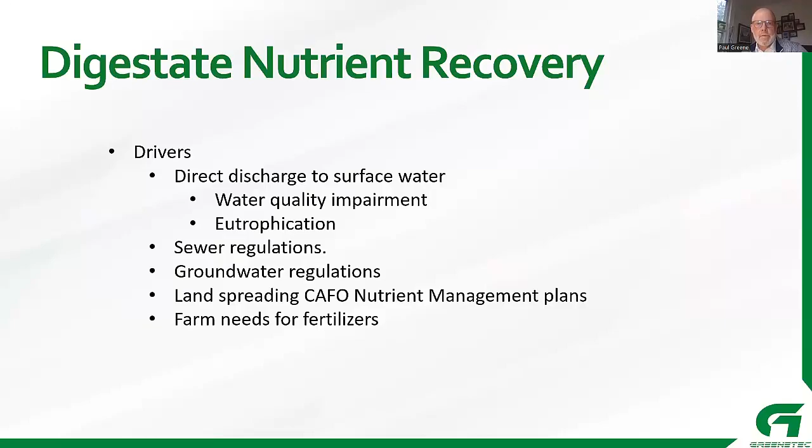So common mistakes on RNG projects - don't forget the nutrients, right? People talk about the feedstock and the carbon and the VS and the TS, and that makes the good stuff, that makes the gold, that makes our RNG. But don't forget the nutrients staying behind in the digestate, because if you do, the project will hurt.

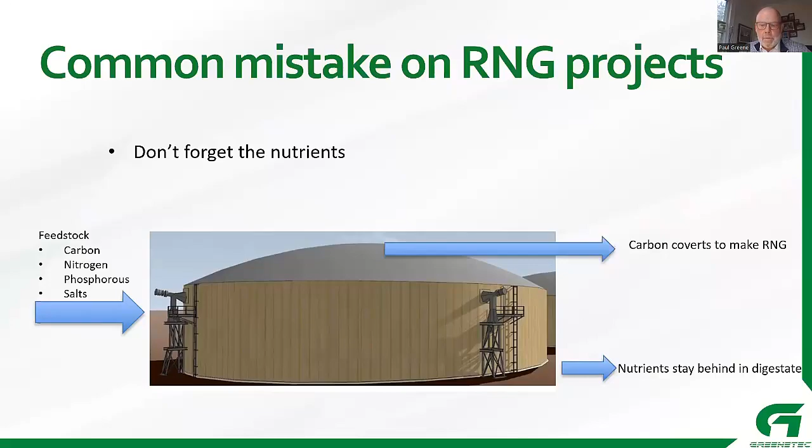So thinking about nutrient treatment versus recovery - treatment, a lot of technologies come out of the wastewater treatment space, so you're kind of treating it as a wastewater, destroying the nutrients, kind of hoping they disappear. Recovery is we're trying to capture nutrients in a way that creates a value-added fertilizer that the crop-growing community finds to be of value.

Some things to think about are price volatility of operating cost chemicals, acids and caustics, and price volatility of recovered fertilizers. As you make a capital investment upfront in a significant asset, there are some costs that are hard to control. Finding a long-term off-taker on recovered fertilizer for secured price - the fertilizer market has been very volatile of late. The war in Ukraine really triggered some real volatility in prices of things like ammonia, so trying to make good decisions in light of that.

Material handling and storage is a concern. Your digestate's going to come out 24/7, but sometimes fertilizers are only required a few times a year. So as you recover nutrients from digestate, what are you going to do with them? Are you responsible for them? Do you have partners that can help take up some of the slack?

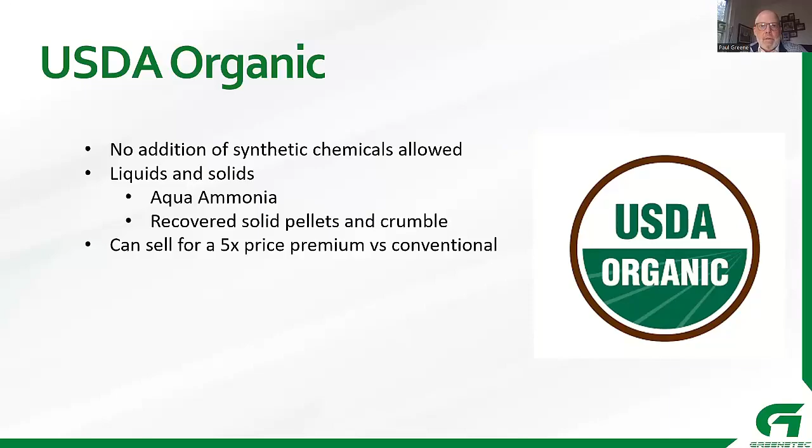Also think about applying the fertilizers - are you applying the fertilizer directly to the soil? Some plants you can apply directly onto the plant after it's come out of the ground, but certainly want to make sure that it's all compatible.

So fertilizers, things like aqua ammonia, you might find them in the 5 to 16% nitrogen range. Sometimes they're stabilized with something like organic citric acid. Ammonium sulfate is another common one, where you've got sulfuric acid reacting with ammonia, and ionically you're making that ammonium sulfate, as well as organic ammonium.

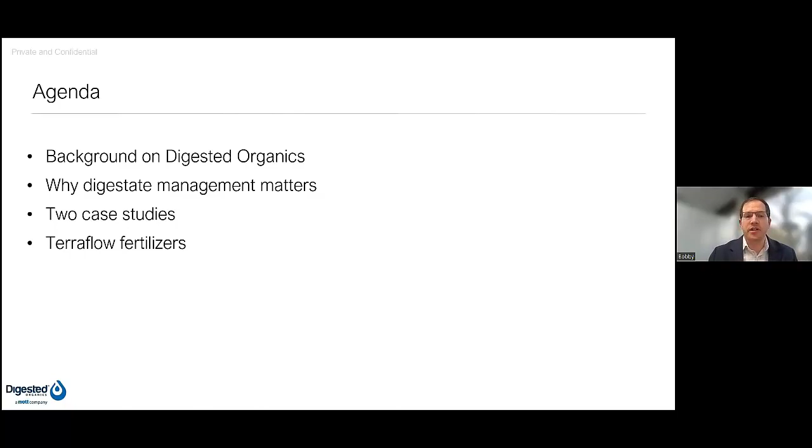Which we brand under our TerraFlow Fertilizers brand name. Our vision and our mission is to upcycle liquid organic wastes into clean water and value-added products, particularly when we talk about digestate, which is usually on the order of 97% water, 3% nutrients. There's a lot of water there to reclaim in certain areas, and that means more than others, but those products also can mean a lot in terms of revenue generation and added environmental benefits.

So we do this both for digestate as well as a slew of other waste streams throughout various industries. As a company, we are a full-service engineering and manufacturing firm based in Michigan. We engineer, design, and then make filtration systems to tackle lots of different waste streams. Today we'll be talking about digestate, and I want to highlight that we do that in a project management environment. Every project gets a unique project manager dedicated to it, looking at all the unique aspects of that project for our customer, which tends to be a developer or an EPC, as well as their customer, which is the farms, the community, et cetera. So really looking to provide holistic digestate treatment solutions.

Here's a couple of pictures of our shop. We're about a 20,000 square foot facility in Plymouth, Michigan, just outside of Detroit. As a company, we're about 50 individuals in our unit, and then we merged with the Mott Corporation, a larger company based in Connecticut, about 60 years of specialty experience with gas filtration. Pairing both of our companies together, we really offer a full suite of services, both in the liquid side also.

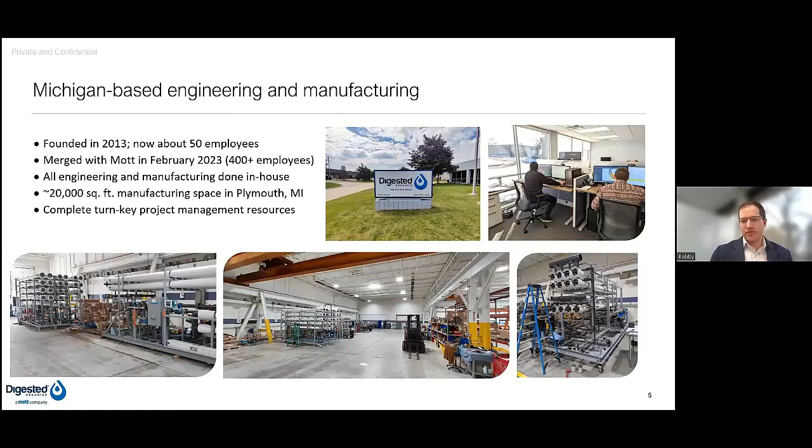So what we're going to talk about today is really how our platforms can convert digestate into value-added resources and increase profitability in your projects. It really is in some cases a closed loop where we're taking this manure that's been digested, going through a solution, typically filtration based, but also sometimes with evaporation and other technologies added on, getting that clean water and organic fertilizer back in a loop to that animal. Whether that's water for animal drinking water or fertilizer to grow crops that animal will eat. So really trying to holistically address what a lot of these biogas projects are facing when it comes to nutrient management.

A couple of the benefits, and really the reason why you would do digestate treatment and not just land apply the digestate, I break it into financial, environmental, and social benefits. I just want to highlight on a couple of these because Paul already mentioned this. Obviously, there's reduced hauling and spreading costs.

But something that fewer people know about is that if we actually treat the digestate and remove volatile solids from it, we can improve a project's CI score, because the model assumes a certain amount of leftover organics that are stored in our lagoons and still release methane. So we've actually quantified that and can help customers evaluate the impact of that.

Obviously, if you can sell fertilizer, that's a huge value add to a project that might not have had that before. I think we're also seeing a change in mindset where if you can tell the feedstock providers that you can reduce volume—so if a farmer gives you 100 gallons of manure and you only give them back 50 gallons of digestate—they're willing to pay for that in essence. And that can be a big part of the economics of how a project was run.

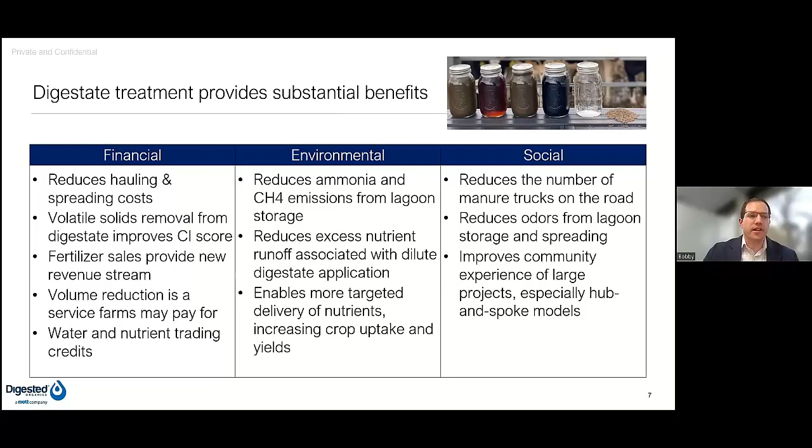There are kind of four main types of digesters that we're working with today: dairy, swine, poultry, and food waste. I think each of them have some unique characteristics I just want to highlight, so when you think about some of the solutions we offer and the projects you're running, you can think about what makes the most sense for you.

So dairy—some of it tends to be pretty dilute, so it's costly to haul and spread. But when we look at the two case studies I'm going to show you, one makes a liquid concentrate that has almost all the phosphorus in it, and the other makes a solid concentrate. Some sites are set up to handle solids, and some are not—some just have lagoons. And so that's sort of a major consideration when we think about spreading throughout the year.

In swine, we see a lot of large covered lagoons that get cold in the wintertime and don't produce gas. But if we want to process digestate year round, how do we do that in a way that preserves those volatile solids so that the gas revenues don't suffer? We have a solution for that. And then we also see that they're facing nitrification and denitrification costs from existing treatment programs that we can overhaul, and actually use the nitrogen to make a fertilizer instead of just paying a bunch of money to put it into the air.

Poultry, and to some extent food waste, are unique in that they tend to come in with a really dry feedstock. So some of this poultry manure litter can be 40 to 50 percent dry matter that requires dilution.

We can help with this by adding a liquid through the digestion process, then you need to pull that liquid back out, typically remove the ammonia and reuse the liquid because you can't afford to dump in fresh water and then haul away digestate. That, again, with food waste can come in pretty high solids as well. So it's something to think about in each of these feedstocks, and something we have solution sets for.

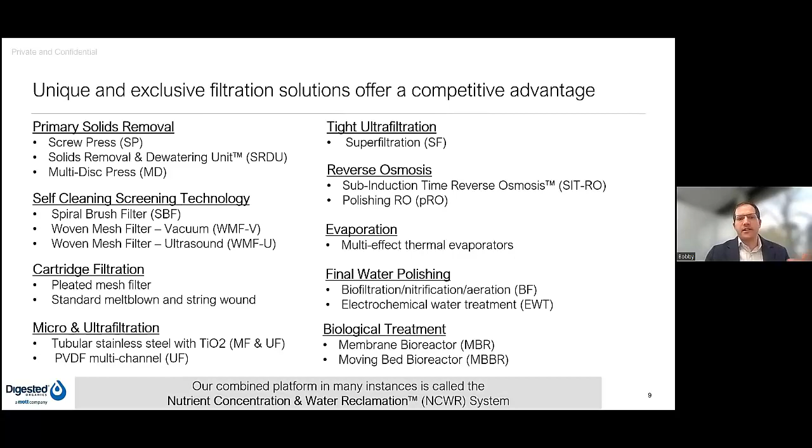This is the entire slew of equipment and unit operations we provide. We're not going to go through this in detail. Instead, we're going to focus on two main case studies that highlight several of these technologies and how we put them together to treat digestate.

The first technology platform I want to talk about is what I call our all-liquid platform. Basically, all of the concentrated nutrients are in a liquid form. We're not making a stackable solid anywhere.

This is our BC Organics project in Greenleaf, Wisconsin. Dynamic is the owner of this project, and it is designed for 720,000 gallons per day of pressate. They're digesting dairy manure and screw pressing it, and we get the liquid pressate from the screw press. We're designed for 50% recovery as clean water back to the farms or to be river discharged.

The technologies we're using are a stainless steel ultrafiltration system, which is a tubular membrane, superfiltration, which is a tight ultrafilter with very fouling-resistant chemistry, and then a unique process for reverse osmosis we call sub-induction time reverse osmosis, a sequencing batch style process to help boost recovery and lower energy costs. We then polish that water with biofiltration.

The key to this whole platform was to keep all the concentrates liquid, designed so everything could be pumpable and easy to move back and forth to the farm, really targeting volume reduction for these farms.

I have pictures, but I also thought, if this video will play, we could just see the equipment as it is at the farm. We'll narrate here as we go, but this is the facility.

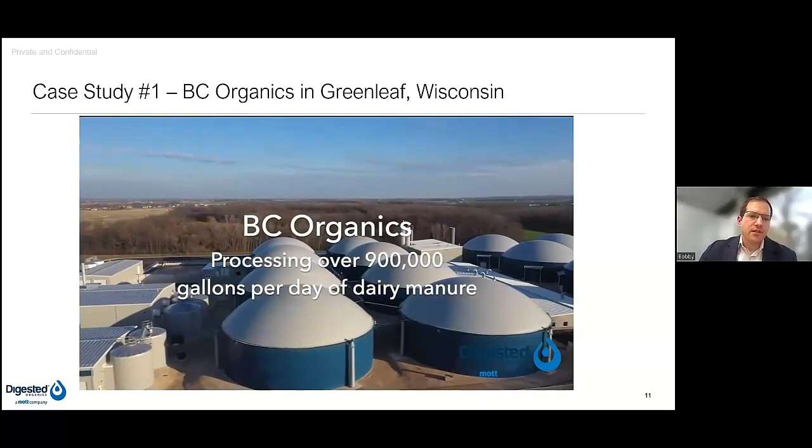It has 16 large digester tanks that are 1.3 million gallons each, processing close to 1 million gallons per day of raw manure coming in. This building here on the floor is where the water treatment equipment is. They're using Börger presses to create liquid pressate, and then around 135 tons of fiber per day.

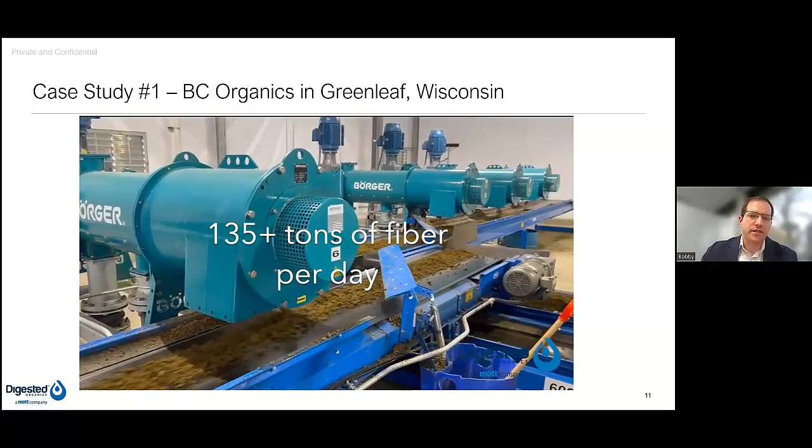This is just upstream of our process. This is pretty common, to create a bedding product. They're actually then running that bedding product through rotary dryers to create a sellable bedding product for nearby farms to purchase, and there's some excess product that is also produced.

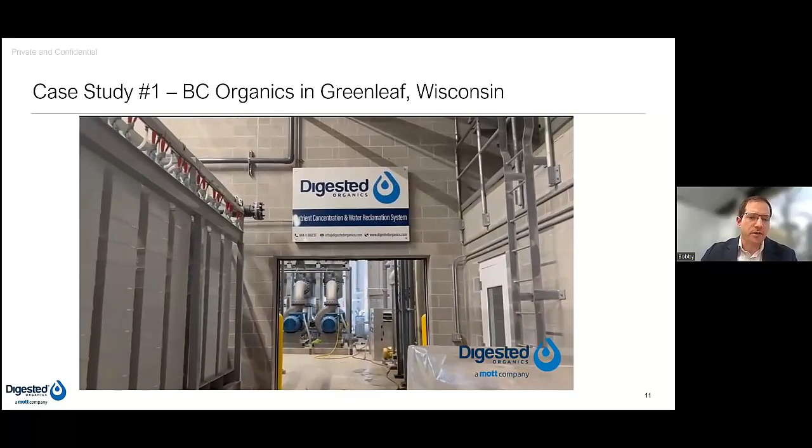This is our facility called the Nutrient Concentration and Water Reclamation System, again comprised of multiple filtration unit operations. This is looking at the ultrafilter, the main first step in the process, taking the pressate and removing suspended solids, which is principally all of the phosphorus.

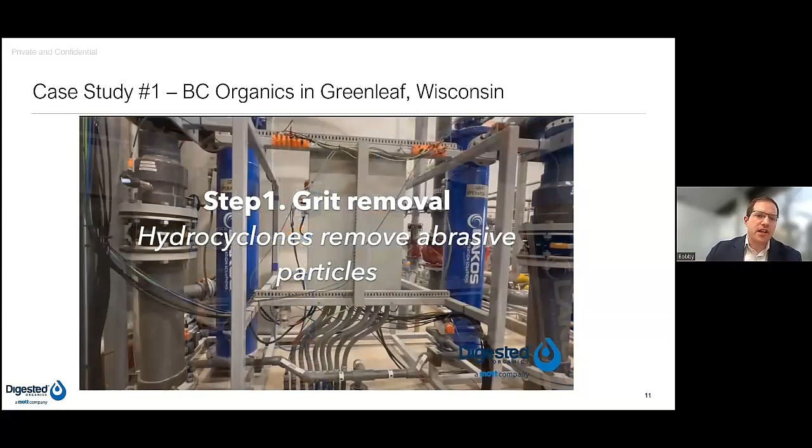The first step on the way to the ultrafilter is actually some grit removal, to help remove sand and abrasive particles before going to the filters. This is a non-powered, hydrocyclone-like approach. These are the stainless steel ultrafilters, and again, we're seeing 90+% phosphorus and organic nitrogen removal in these, producing a clear amber colored permeate.

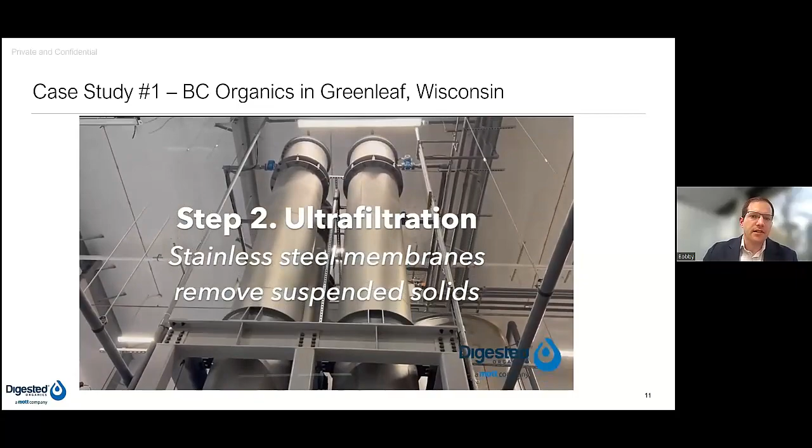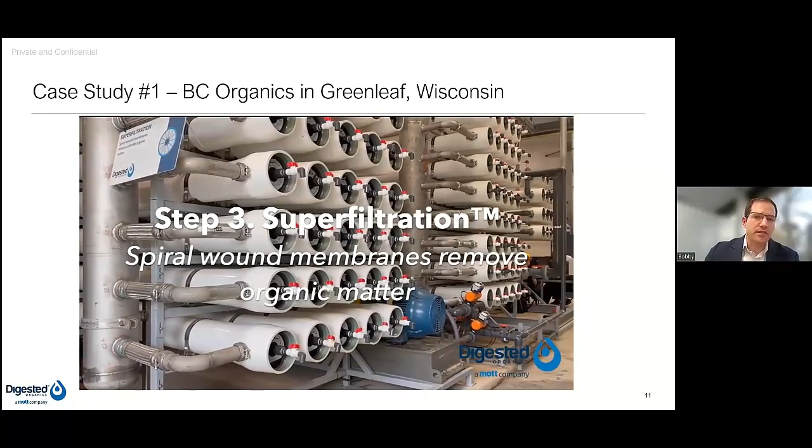This is what the superfiltration looks like. These are spiral wound membranes, and again they're doing a tighter cut. It's sort of like a second stage of ultrafiltration, but with a very tight ultrafilter membrane, to get lighter colored permeate that'll then go to the reverse osmosis system.

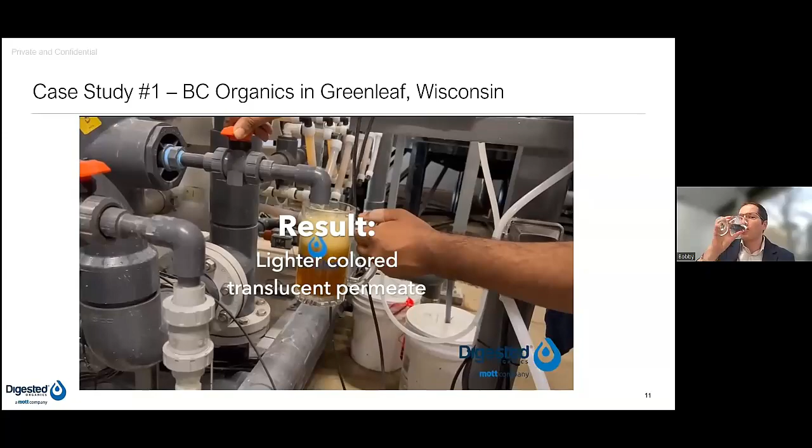This is the high pressure reverse osmosis system. There are actually two ROs in the project. The first is high pressure, concentrating all of the ammonia and potassium into a liquid concentrate, and then making clean water, which you can see here.

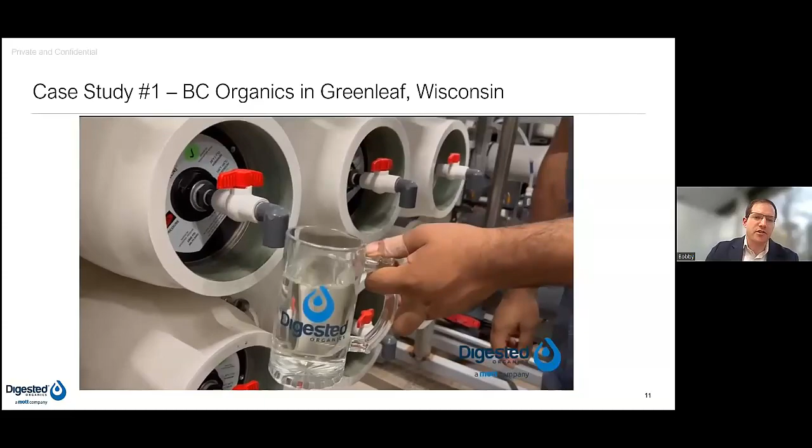That clean water is then put through a polishing RO at low pressure to do a final polish, another 90+% removal of various contaminants, including ammonia, to make our clean water product.

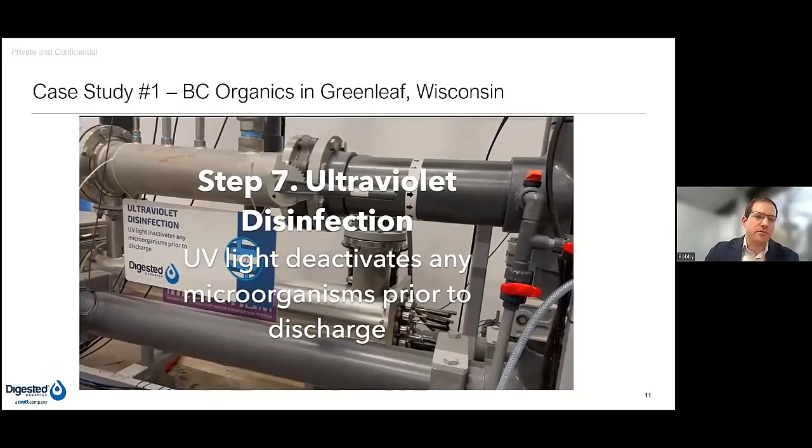And then as a final step on the way to the river, they go through biofiltration towers. These are packed with a small plastic media that bugs are growing on that can nitrify the ammonia, remove any trace amounts of organic matter left, and then send that water nicely aerated through our ultraviolet disinfection system and out to the river or back to the farms for reuse.

They have need of it for irrigation, like in warmer months.

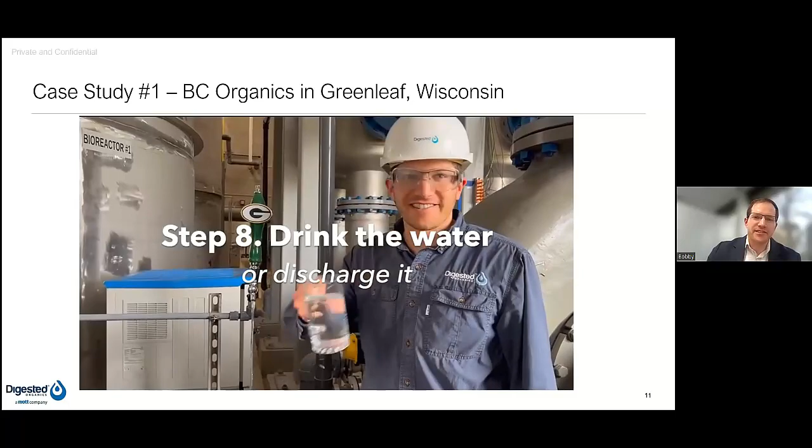And then here is a goofy video of me drinking the water on my last trip there. We have a Green Bay Packers tap for anyone who's interested. Actually tastes pretty good.

And then these are just a shot of the materials as it's going. So you can see it starts with the digested pressate on the left and gets clear as it goes.

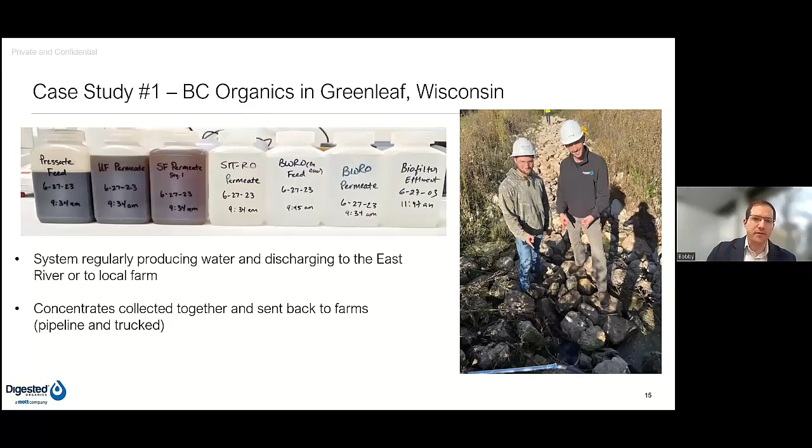Some of the learnings I want to highlight for people here that we've seen bringing online this large plant, really the largest that we're aware of that filters digestate at this scale, is that there's lots going on in our project, both with different unit operations as well as upstream.

So how are the screw presses running? How is the dryer running? If the dryer goes down for 2 hours, then we have to shut off the screw presses, and then we don't get pressate.

So I think we are learning about how to balance those different operations with potential upstream upsets, and where would we have rather had bigger tankage to allow for continuous operations while there's upsets. We have probably smaller tanks than we want between different buildings and operations, and I think that's something future projects should think about when you plan operations with lots of steps dependent on each other.

Something else I'll mention is temperature management. Our NPDES discharge permit requires certain temperatures for every month. Interestingly, in the winter time, as many of you know, the digestate is right around 100 degrees Fahrenheit, loses a little bit of temperature on its way to our building. We add a little bit of heat to it as we filter it.

We actually need to chill that clean water before it hits the river because it is too hot. Our water's coming out warmer than the discharge permit allows for. So obviously there's lots of ways to do that, whether it's geothermal or air-cooled chillers or things like that, but it was a requirement sort of outside of our scope, something we worked with Dynamic on that we didn't realize was going to be as much of a problem as it is.

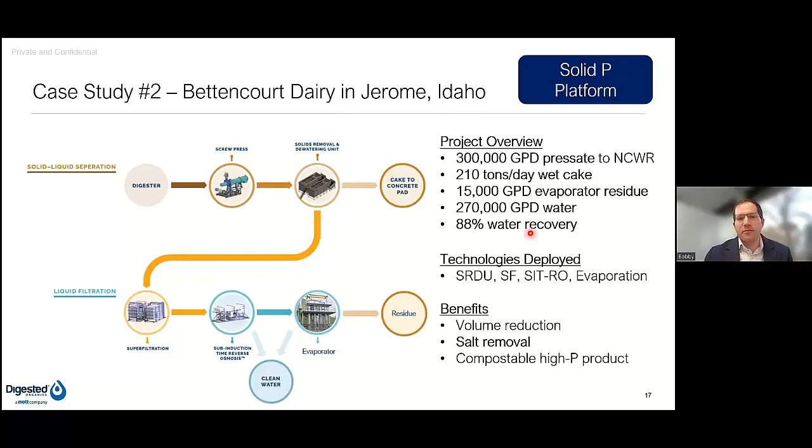This is interesting. And again, the benefits are really around volume reduction, salt removal, and then making a compostable high phosphorus product. So this is what the SRDU looks like.

It's a unique system to get compressed air and very unique high molecular weight polymers into the digested pressate, flocculate it, float it, and then press it to make the cake and a clarified digestate.

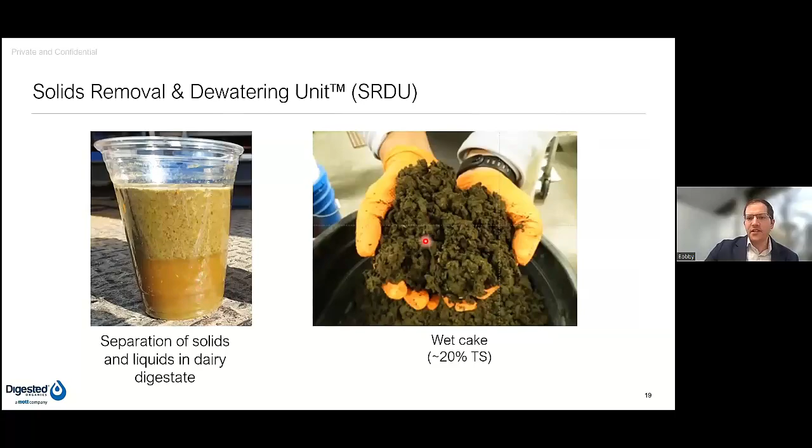Again, this is containing most of the phosphorus, and then this is the clarified liquid. This is an example of what that cake looks like—a nice stackable cake, usually around 20% solids.

In terms of volatile solids, we're seeing about 75% removal. This goes back to that CI score I was talking about—if your project today is just evaluated as digester plus screw press, or even digester plus centrifuge, we can use this technology to remove 75% of the volatile solids. That will result in like a 10 to 20 point CI score bump, which we've had verified by third parties. So that's one interesting thing this does.

The second is removing about 84% of the phosphorus present in that pressate. So a very high removal rate on phosphorus, also on organic nitrogen and suspended solids, and it sets you up well for downstream filtration. But if you're a project that just needs phosphorus removal and wants a little CI score bump, bolting an SRDU onto what you're currently doing can be really advantageous.

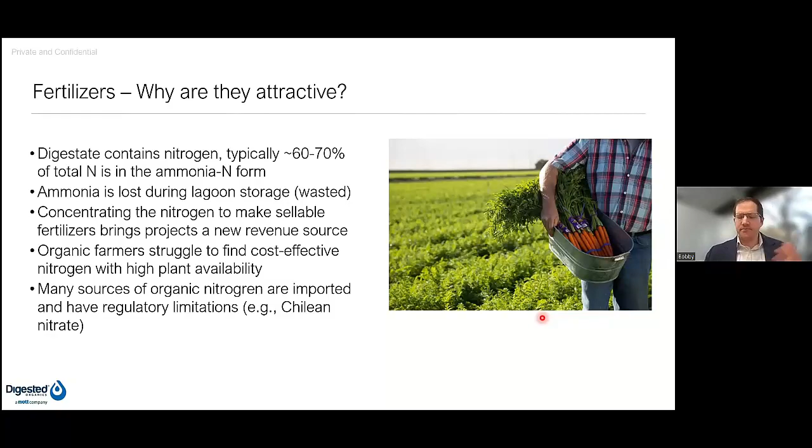We want to deliver plant available nitrogen out of the gate. And finally, some of the organic sources today are not only expensive, they have regulatory limitations—like Chilean nitrate, for example—and it complicates how growers can distribute that product. Canada has different regulations than we do. So it'd be great to have new sources.

So we have two kinds of products I want to talk about. The first are aqueous ammonia solutions. If you're not familiar with fertilizers, they're usually labeled with their N, P, and K. So we have an 800 and a 1600 product. They look and handle identically—like water, no salts in them, but they are volatile, like Paul said.

So we're at high pH, and they need to be treated the way a farmer would handle conventional aqueous ammonia. That means it's tilled into the ground, diluted and distributed through drip tape—not center pivot irrigated into the air, for example. So it's nothing new for agriculture; farmers have been dealing with ammonia, even anhydrous.

It's just a new consideration for organics. Obviously both of these are OMRI listed—they are certified today for use and ready to go. So we've crossed that hurdle, and we've created two concentrations so buyers have options. Obviously, it's less expensive per pound of nitrogen to move the 1600 than the 800, just because of the concentration.

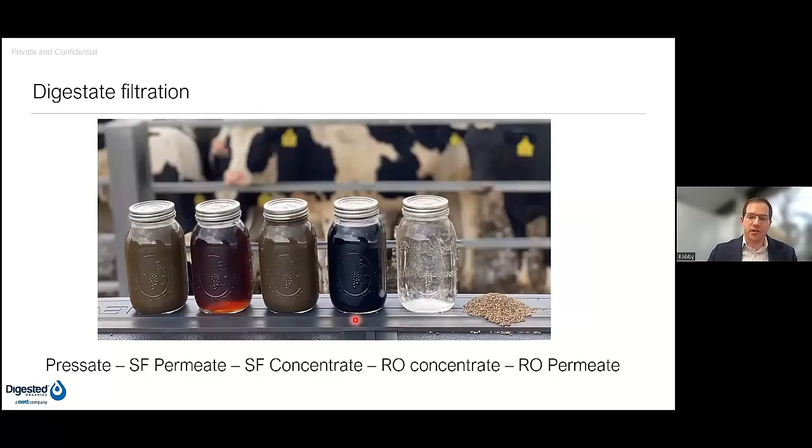One final thing I want to end on. A lot of developers are interested in these hub and spoke models, but they have dilute manure or manure that's really far away from the digesters. So something I think we can also offer is a filtration solution that actually concentrates the volatile solids in the feedstock prior to digestion. This also concentrates the phosphorus and organic nitrogen. We use our ultrafiltration or our SRDU for this, but just wanted to say that's another technology we're offering the industry. We have some cool videos on YouTube that Paul's been great about putting up for educational purposes, so definitely check that out.

If you have a project, we'd love to talk to you about how we pilot. We have a significant pilot program that involves either samples coming to us in Michigan or equipment coming to you wherever your project is. It's a big part of how we start working with a client, and also how we show them, with their exact digestate or manure, where nutrients partition and how best we can serve them with different technologies. So I'll stop there and see if there are any questions.

Thank you, nice job. So the concept about CI score improvement is getting some traction. I'll read this: Why would nutrient separation improve CI score by removal from digestate? If they're volatile, was the digestion process inefficient? How much would separation improve the CI score approximately?

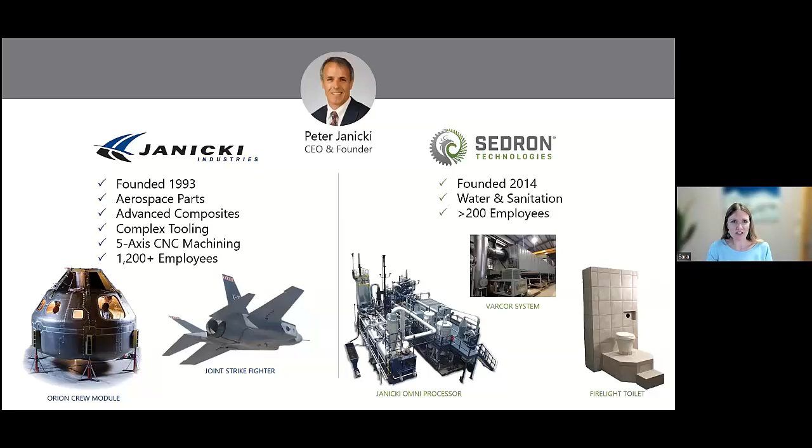Before I talk about the Varcor, just a bit of background on Sedron to give a bit of grounding as to who we are. So we were founded about 10 years ago, but we have a longer history than that. Much of our leadership came from our CEO and founder's other company, Janicki Industries, which is about 30 years old. Janicki Industries is a technology leader in the aerospace and composite world, and we like to say that if you see anything in the air, whether it's private, commercial, military, whatever, Janicki Industries played a role in the technology development of that piece of equipment in one way or another. And that same technology development DNA is at Sedron.

So Sedron's an engineering-centric company, and we like to innovate every part of the business and be quite vertically integrated. So we invent technology, we do all of the detailed mechanical, electrical, chemical design, we design our manufacturing facilities to make that equipment ourselves and make it inexpensive. We build all of our electrical panels, we write all of our controls, and then we also go as far as developing the projects, installing our equipment, and then operating our equipment long term. So we don't actually sell our technology, we own the business holistically and provide it as a service. Apologies, I've got a cold and my voice is struggling, but I think I'll be able to get through this.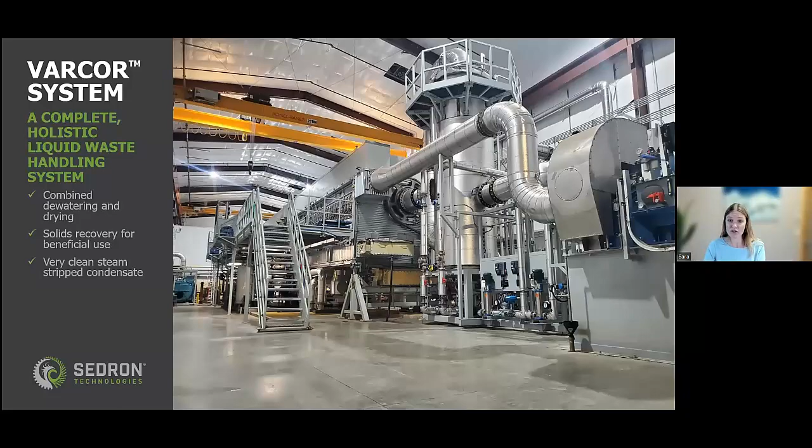So the Varcor, though, that's what we're here to talk about, relative to digestate. The Varcor system is a holistic liquid waste handling system. It combines dewatering, drying, and distillation to take in a wide variety of waste streams and separate them into beneficial reuse components, depending on what's coming into the Varcor. It also creates clean water that can be used for many purposes.

At a super high level, what the Varcor does: it takes in the liquid waste and sends it into a dryer as the first step. In the dryer, the waste is heated up to boiling, so all of the liquid leaves and you're left with a dry solid that's pathogen-free, seed-free, weed-free coming out. Going back to Bobby's comments on NPK, it's typically about a 3-3-3 product if what's coming in is digested manure. So that's a fertilizer product, pathogen-free.

The vapor that leaves is sent through a compressor, and it's now at a higher pressure and temperature, and that is used as the energy source for drying additional incoming waste as that steam is condensed. Then that saturated liquid is sent through a stripping process where we separate the water from the nitrogen ammonia, so you're left with three outputs: the dry solids, a nitrogen fertilizer—this is a 10-0-0 stabilized, pH-neutral fertilizer—and clean water.

The backbone of the technology, because we use a thermal mechanical process—a lot of people's gut reaction is, wow, that's a lot of energy if you're going to be evaporating a million pounds of manure a day. But we use mechanical vapor recompression, which is much more energy efficient. So just a very basic overview of how it works, because we get a lot of questions about this as people try to wrap their minds around what we're doing.

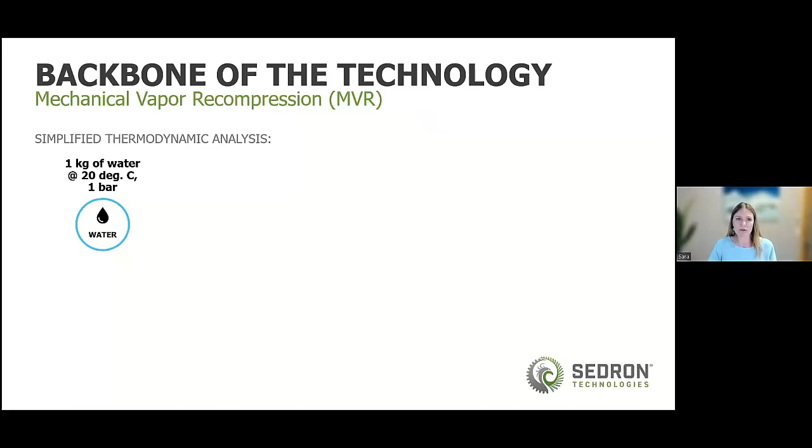If you take a kilogram of water at ambient conditions and turn it into steam, your gut reaction is right—that takes a lot of energy. It's about 2,400 kilojoules for every kilogram of steam that you evaporate. But if you then invest a small amount, about 50 kilojoules of energy, to buy electricity to run a compressor, you now have that same steam at a slightly higher pressure, about 1.4 bar.

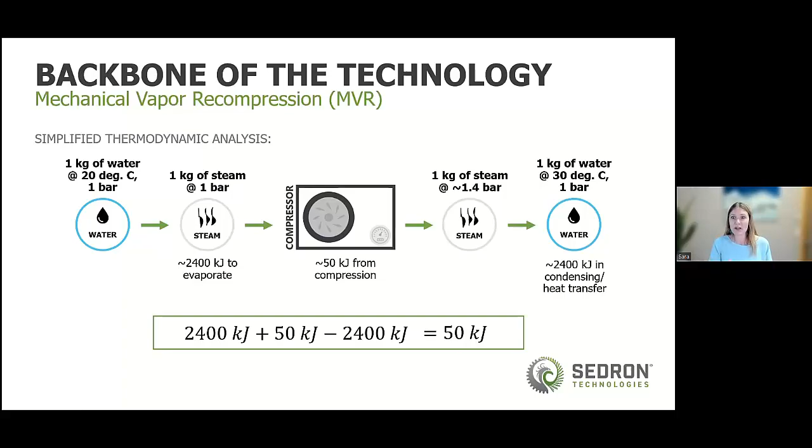Now, if you recondense that, you can get that 2,400 kilojoules back. If you draw a box around the whole thing and look at a first law balance, you took water from 20 degrees to 30 degrees with ultimately only investing 50 kilojoules of energy. But in the meantime, you got to go through multiple phase changes and do all these clever things to separate the different nutrients and components into beneficial buckets.

If you look at that, a Varcor compared to a traditional natural gas boiler with just direct drying, we're about 30 times more efficient. We are doing 15 megawatts of thermal energy transfer in the Varcor, but we're only investing 500 kW.

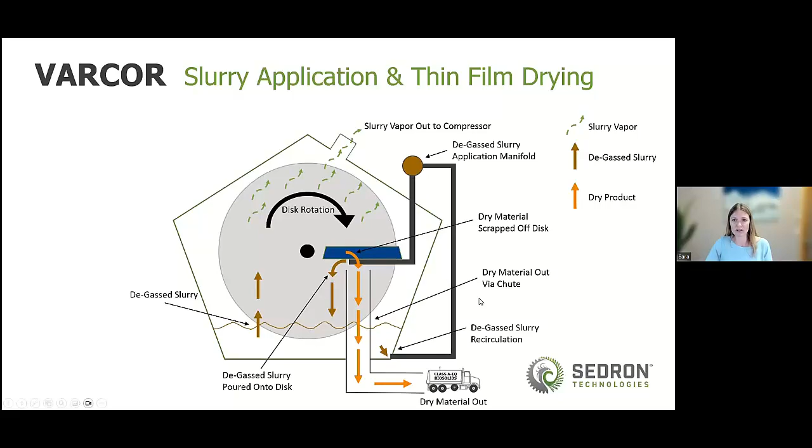All of your solids get scraped off and sent out to be managed as a dry product. All of the steam and vapor, ammonia, that would evaporate off gets sent out to the compressor. So that's the details of what's happening within the dryer. The excess material that doesn't stick to the disc face gets captured at the bottom of the evaporator and is sent back in this recirculating direct application system.

The vapor gets sent to the compressor where it's increased at approximately 0.4 bar and then is sent to the inside of the spindle. As it starts to condense, you get this stripping action such that most of the ammonia that's in the product is going to leave in a concentrated form out of the spindle in its own pipe. And the water is going to be stripped of that ammonia and sent out the other end.

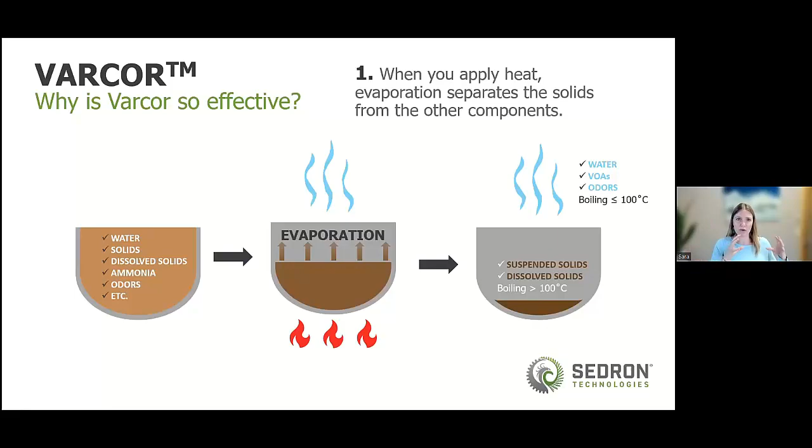It's incredibly effective and robust to do that every single time, no matter what the waste stream. Then if you capture that vapor, which now has water, ammonia, odor, other VOAs—anything that boiled at or below 100 degrees Celsius—and start to cool those products down, they all want to recondense at different temperatures. This allows us to capture them into separate buckets: we capture the odors and send them to odor control as a point source control, the ammonia recondenses at a different temperature so we capture that, and we capture the clean water. It happens every time the same way, regardless of what was in it to begin with.

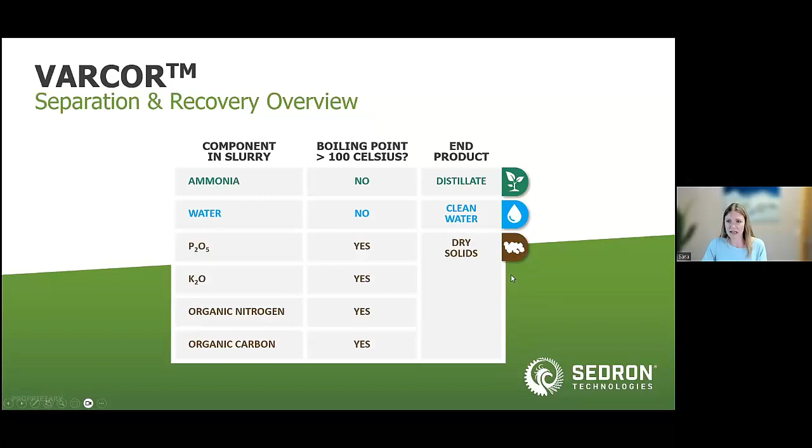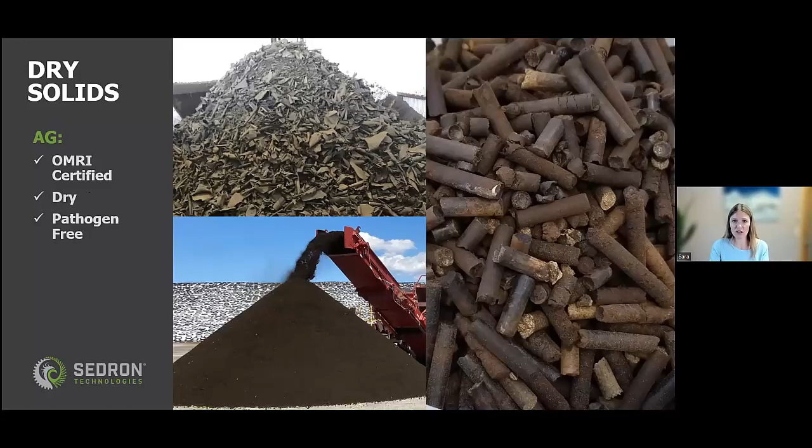And then we create this nitrogen fertilizer, which we have certified in two different forms—a 300 and a 1000. Bobby already talked about the benefits this has to farmers, so I won't elaborate too much more, but being able to have a pure nitrogen fertilizer source that is plant available in year one is really huge. This is a huge impact to the economic story.

Only got a few minutes left, so I'll go quick. Our core business model, like I said before, is that we don't sell our technology, we sell the service. We build out a project, and the project gets tipping fees. If tipping fees matter, sometimes we charge a manure management fee, sometimes we don't. In projects using human waste or other things, we might charge a tipping fee. But really, on a digester project, the real economic story comes from selling that nitrogen fertilizer and selling the solids.

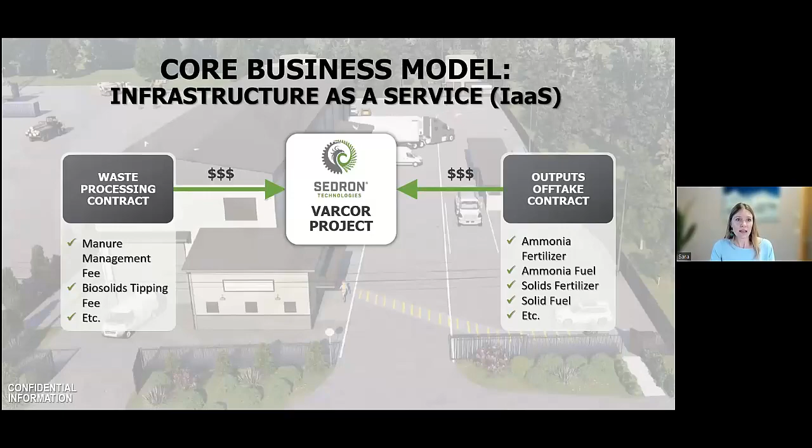Here's what it would look like at a couple of different farm scenarios. We can take raw manure in, do grit and fiber removal, and send it into the VARCOR to make your water, nitrogen, and solids. Or, with a digester like we're talking about today, you send it into the digester, it does its deal making biogas, then we do fiber removal and send it to the VARCOR after that. One reason we really like a digester project over raw manure is that the digester also converts a lot of your organic nitrogen to ammoniacal nitrogen.

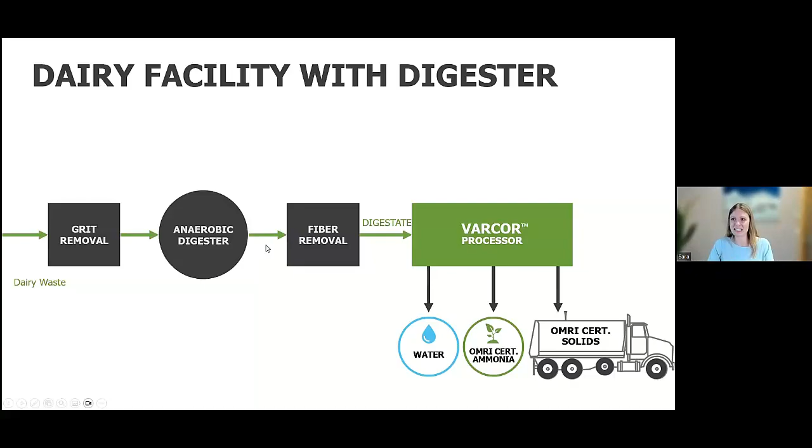So we actually make a higher volume of this organically certified nitrogen fertilizer, which really changes the economics of the story. So that's our favorite pairing, is a dairy with an anaerobic digester.

I'll go through this quickly, some of our sites that are up and running. Our first project was a 4,000 cow dairy in Indiana. This is with raw manure. It's been operating for about 4 years now, and we process about 40 million gallons a year of raw manure.

This was a pilot that we still have. We built it several years ago and we've run it at various sites around the world. We can ship this, it fits into 2 shipping containers. We can send it to a host site and run small scale testing to show how that product will behave in a VARCOR. Our first project was that we sent it to a rum distillery in the US Virgin Islands, ran it for about a month there. Currently it's at our facility here in Washington, running on direct biosolids. We can run it on all sorts of different products, and we can send it to the host site or test it at our site by sending the waste streams to us.

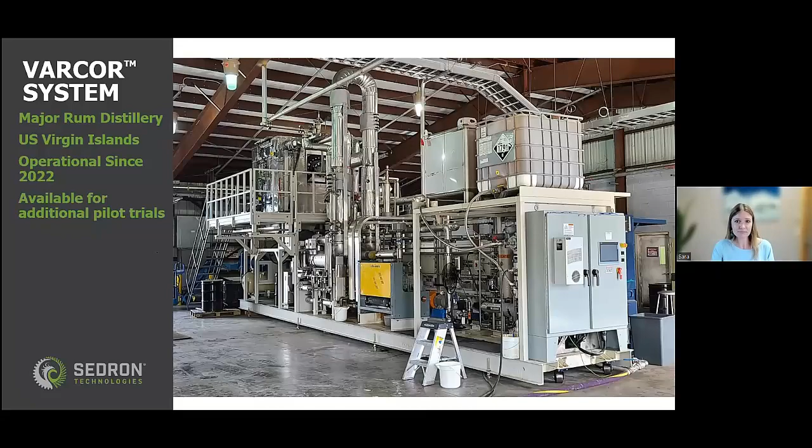Another project that we have up and running is in Washington State. It's been running for about a year. We get trucked septage and biosolids from the local community to our facility, and we process it through the VARCOR. Our dry product gets sent to farm fields in eastern Washington, and the clean water goes back to the city.

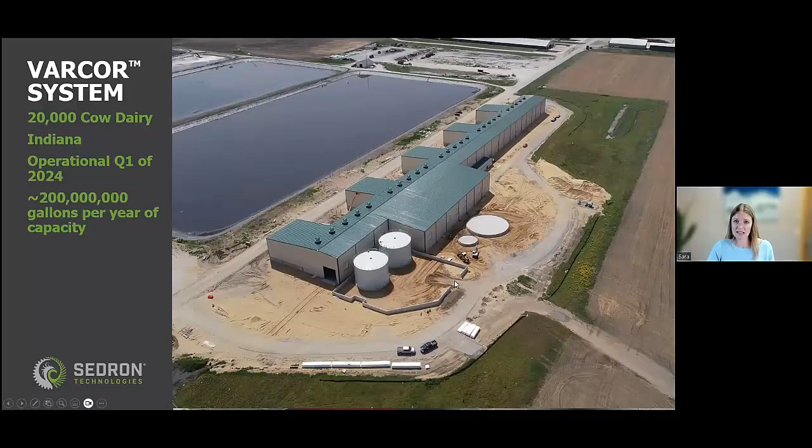Our next project to come online, starting commissioning next month, is for a 20,000 cow dairy with a digester in Indiana. This is taking digestate at about 200 million gallons a year. We have 5 VARCORs in this building end to end, and we're generating stabilized nitrogen fertilizer with a long-term offtake contract for that. The dry solids are going to local farmers in about a 200-mile radius.

And our next project coming online later this year has 3 VARCORs at a 12,000 cow dairy in Wisconsin. Sorry for rushing there at the end, but I am just at time. So that's the short story on Sedron and our VARCOR technology related to digestate.

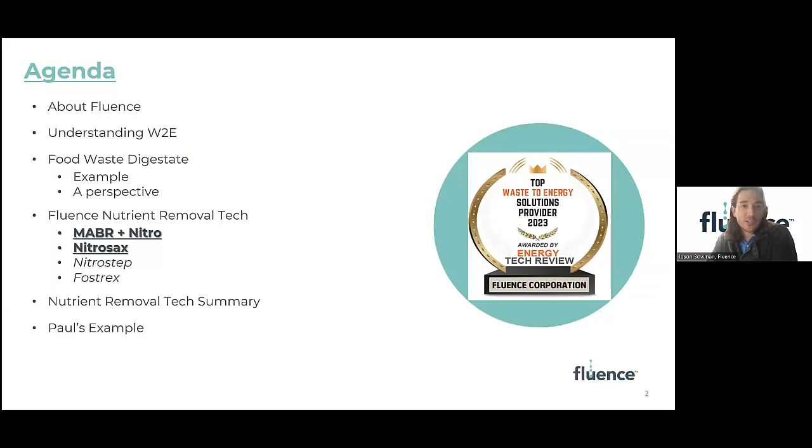But yeah, just to give everyone a general intro to Fluence: we're probably one of the biggest companies you haven't heard of in the US in terms of water and wastewater operations. Fluence focuses on everything that is water and wastewater, both on the municipal side and on the industrial side. My specific focus is on anaerobic digestion facilities, and the way Fluence operates, as I mentioned, we are a global company. So headquarters is in Minnesota, but we have engineering, design, manufacturing, marketing, and other management offices all over the globe. So we're pretty much in every time zone.

So what we are here today to talk about is the digester and digestate side of the business. Fluence being an anaerobic supplier, we do the design and supply of anaerobic systems. With our wastewater division, we know a bit about the digestate side. What Bobby and Sarah had talked about was more on the recovery side. When we're talking about digestate treatment, most of our technologies are focused on nitrogen reduction, i.e., let's destroy it or convert it to another form that comes out of the wastewater.

What I want to touch base on today is, depending on the type of project that you have, food waste - everybody puts it in its own little box, but if you go to 10 sites, you're probably going to have 10 different, slightly variable digestates. A lot of that depends on the type of digester and how the digesters are operated, but a lot of it depends on the pretreatment as well. So there's a lot of things that impact the digestate side of things, what's coming out of the digester, and we're going to focus a bit on that today.

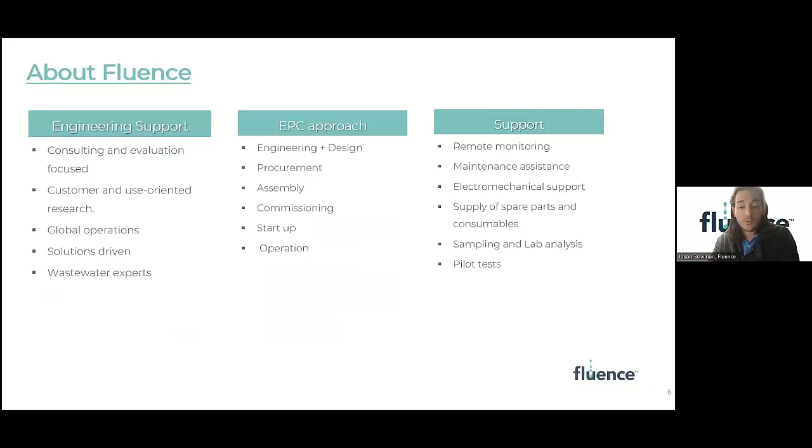Understanding anaerobic digestion and digestate in general, when you get into these big food waste projects, the type of feedstock that comes in impacts your, number one, digester design, number two, digester performance, and number three, what's coming out. When you start getting into feedstocks that are more lipid or fat based, there's a lot of energy generation there. When you get into projects that have more of simple carbohydrates, things like that, maybe proteins, the energy generation is a little less.

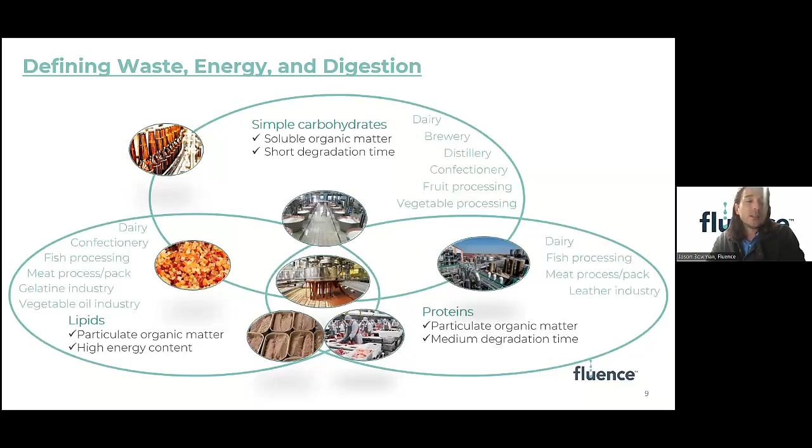So in these food waste projects, that's why a lot of times you see methane and RNG production going up and down, but also the characteristics of the digestate change, due to a lot of different mechanisms and a lot of different feedstocks out there. A lot of these facilities have multiple varieties of feedstock - it's a combination, not often just dairy, or just a brewery, or just a slaughterhouse. When you get into these larger cogen facilities, developer-driven facilities, you're trying to get as much feedstock from as many different sources as you can a lot of times. So understanding what you're getting and how that impacts your digester design and performance is really critical.

So, two points here quickly before we get into the nitrogen removal side of things. There's a lot of different types of digesters on the market. Fluence offers 3 different types of digesters, and we apply these digesters in different situations. When you get into food waste digesters and you have a combination of feedstocks, more often than not, you're going the conventional route with something like a CSTR. But there are other unit processes, and the reason I bring this up is they're all operated a little differently. When I say that, they're geared toward a certain COD concentration, or a certain volatile concentration, or a certain total solids concentration. So the way these facilities come together a lot of times can actually impact what the digestate looks like coming out on the backside. So let's talk about that for a minute.

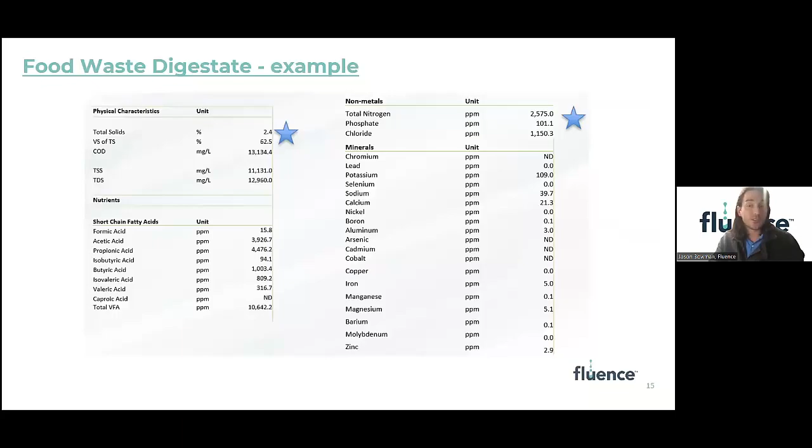Paul had given us an example of a typical food waste digestate - you have your total solids at 2.4%, TSS a little over 1%, and you see your COD there at 13,000. So we're going to use this as an example and roll forward with this, how Fluence would approach this type of digestate. I'm going to give you several examples using the digestate technologies that we have developed. To put this in perspective, I know there's a lot of engineers on the presentation today, and a lot of developers, so a lot of different backgrounds here.

One of the common things we run into when talking with developers or end users is, oh my gosh, why are these systems so large? As Paul mentioned, these are highly concentrated. To put Paul's example into perspective, a 60,000 gallon a day digestate flow rate with those characteristics is basically the equivalent of a 1 MGD municipal facility if you're just looking at the organics, or a 3 million gallon a day municipal facility if you're looking at the ammonia load. If you picture a 3 MGD municipal facility, it's large. So you're trying to treat the same loading, even with a smaller flow rate, in as compact a space as you can.

Putting these things in perspective is often key when it comes to these designs.

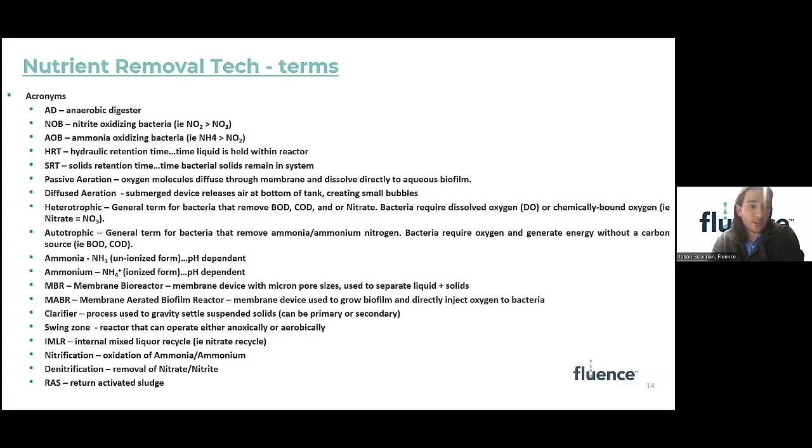There's a lot of acronyms when you get into nutrient removal technology. I'm not going to go over all these in specific detail, but they'll be here for you to reference in the future, and I'm sure Paul will be distributing or posting the presentations as well.

Let's get down to the nutrient removal technology that Fluence has. On a global basis, we're really known for two types of nutrient removal technologies, and they are shortcut nitrogen removal.

What I mean by shortcut nitrogen is, typically when the digestate comes out, it has a bit of organic TKN that, as Sarah mentioned, has been converted to a more readily degradable form - you have your ammonium, if you will. So what these types of designs focus on is taking that ammonium and converting it directly to nitrogen gas.

The conventional method of doing that has been a biological method, right? You either have a series of aerated biological reactors or anoxic reactors that are mixed, and what you're doing is oxidizing the ammonia to nitrite, then to nitrate, and then denitrifying the nitrate to nitrogen gas. So there's a lot of steps in between there.

The technologies I'm going to talk about today basically take that ammonia and skip the nitrate conversion step, going right to nitrogen gas. This is important because it saves a lot of energy - in conventional treatment, something like 40 to 60% of the energy that goes into these processes is that initial oxidation step when you go from ammonia to nitrite to nitrate. By eliminating that one step, you're significantly cutting down the energy in these biologically driven nitrogen removal systems.

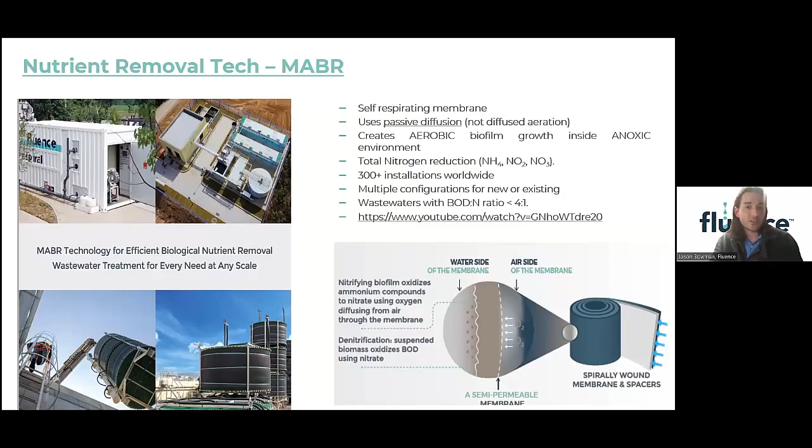Essentially what we're trying to do here is create a mechanism, an aerobic process inside of an anoxic process, so that we're getting simultaneous ammonia reduction and nitrate reduction. It's a much more energy efficient mechanism for removing nitrogen.

If we take MABR to the next level, we have a process called Nitro. Essentially, Nitro is the MABR process operated under a specific pH, a specific DO, and a specific ammonia concentration. If we can control these parameters, you can control the growth rate of specific organisms in these biological reactors. So essentially what you're trying to do is create a mechanism where you favor ammonia oxidizing organisms, but create a condition where the nitrite oxidizing organisms don't like the environment, so they don't grow.

This is how we shortcut the nitrogen removal process. We can take the ammonia to nitrite and then the nitrite to nitrogen gas, skipping that nitrate conversion step. So big energy savings here.

Now, most of the time when we're talking about MABR and Nitro operation, it is a high rate ammonia reduction process, but typically the rate limiting factor here is going to be about 100 ammonia on the discharge. So this is important to understand because the systems do a very good job of getting the initial ammonia reduction, but that last bit of ammonia reduction, there are more cost-effective ways this can be done.

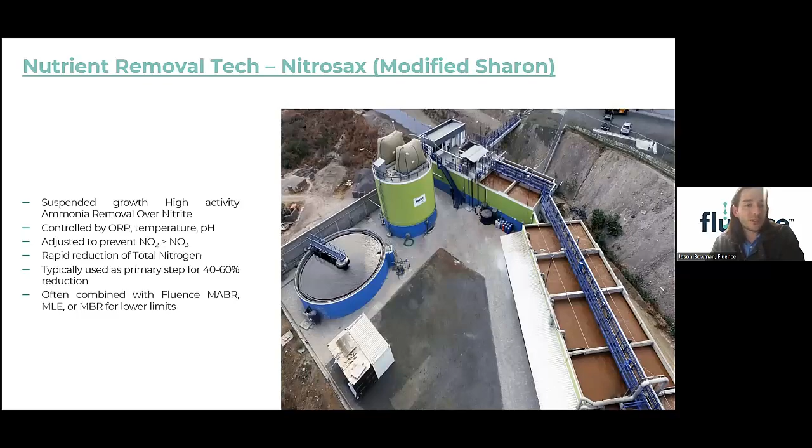Obviously, digestate tends to come in at a high temperature, so in most situations we don't have to adjust the temperature, but we have had some oddballs where, for whatever reason, the digester didn't have heat exchangers or wasn't operated at a high temperature. So there is a consideration in some cases where we do have to have a heat exchanger or something to boost the temperature up. Typically, we want to be 30, 35 degrees Celsius as a normal operating point.

So just to give you a 30,000 foot overview of the difference between the MABR Nitro and Nitrosax process, the main advantage for MABR and Nitro is going to be process stability. It is an attached growth process, so once the bugs are there, once they're populated, it's very difficult to lose that population.

The disadvantage to those technologies is the COD to ammonia ratio, or the BOD to ammonia ratio. If the organics are still too high, you run the risk of having too much heterotrophic bacterial population versus an autotrophic bacterial population. Basically, that's a fancy way of saying you lose the bugs that want to remove the ammonia, and you have more bugs that want to focus on the BOD. The BOD bugs grow much quicker than the ammonia bugs do. So we have to keep in mind that specific ratio, and I'll talk about how we address that in the upcoming slides.

With the Nitrosax process, it's a very simple process, very high rate. Again, it's typically aimed at getting the initial 40 to 60% reduction of the ammonia. So very cost effective, very simple. Main advantage, there's no additional chemicals that typically have to be added to the Nitrosax process, because when dealing with these digestates, typically the chemical ratios we need are already present.

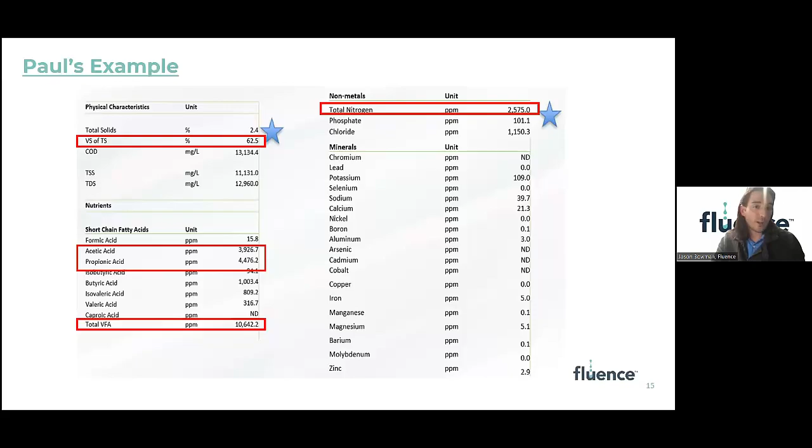Secondly, the COD needs to be knocked down to roughly a 3 to 1 or 4 to 1 ratio. Given the COD and TSS for Paul's example, what we would have recommended is an additional solid separation step, whether it be a centrifuge or a DAF unit or something similar, to get the total solids and TSS down to the 2 to 4 gram per liter range.

The second observation is we would likely want to put in what we call a swing zone, which is a combination anoxic-oxic reactor. Again, the point is to focus on that COD, to be able to knock down any soluble COD left to a point where we can maintain that 3-to-1 or 4-to-1 ratio I mentioned.

So at the end of the day, with Paul's example, what we would actually recommend is more of a conventional step, because of that TSS and COD ratio. So what we're looking at is a two-step Nitrostep process, anoxic followed by an aerobic reactor. We'd have a nitrate recycle and a secondary clarifier. With this type of process, we'd expect the total nitrogen coming out at less than 40 parts per million.

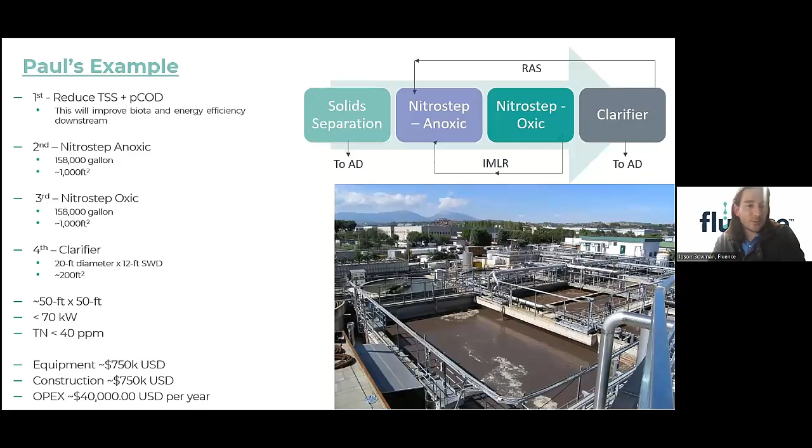So again, 20 minutes, a lot to cover. Hopefully... no, I appreciate it. Definitely lots to squeeze in. So good, Jason. We'll have some questions for you to mop up for us later. And as we transition over to Brian, there's some online if you want to jump in there and answer some of the questions in the Q&A. Sure, sounds good. Okay, all right. Thanks, thank you very much, Jason.

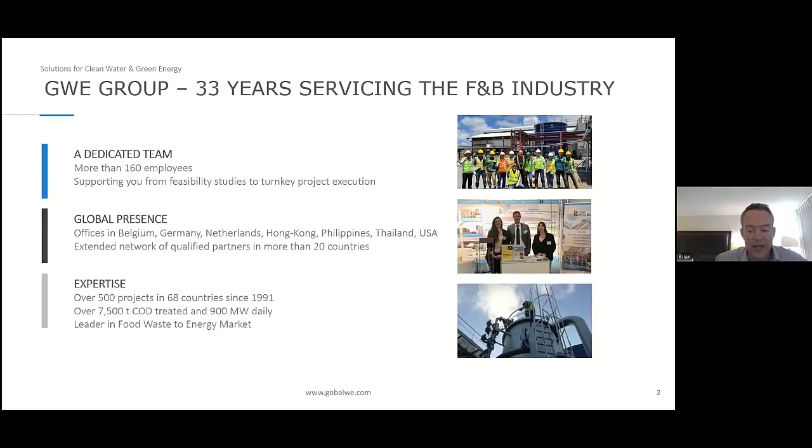One important aspect we bring to the table is digestate management, which really turns into a wastewater treatment project, for a better explanation. Our background has been meeting wastewater treatment regulations for many years, post our anaerobic and aerobic processes. So we've got a very good handle on what needs to be done in order to meet your permit requirements and manage your nutrients as well as your residual organics.

That being said, we don't typically do manure digesters. We focus on the food and beverage industry, and therefore on standalone, food waste energy type digesters. So that repeats some things, but just to give some background on processes.

Digestate is essentially the byproduct of anaerobic digestion. Here I'm showing a small segment of a system. We have the digestate or effluent from the digesters. This is a thermophilic type process in this particular example. That goes into the digestate holding tank or post digester, which is typically at mesophilic temperatures. We still have some level of digestion going on here and still some level of biogas production, but it's essentially kind of a wide spot in the pipe.

It's ahead of your dewatering system, so it allows you to have a dynamic level in this tank. You don't have to dewater all the time. You can work the level down during the week, and then maybe on the weekends you don't have to dewater, Saturday or Sunday, or maybe not 24/7. So it gives you some opportunity to do maintenance down the line as well.

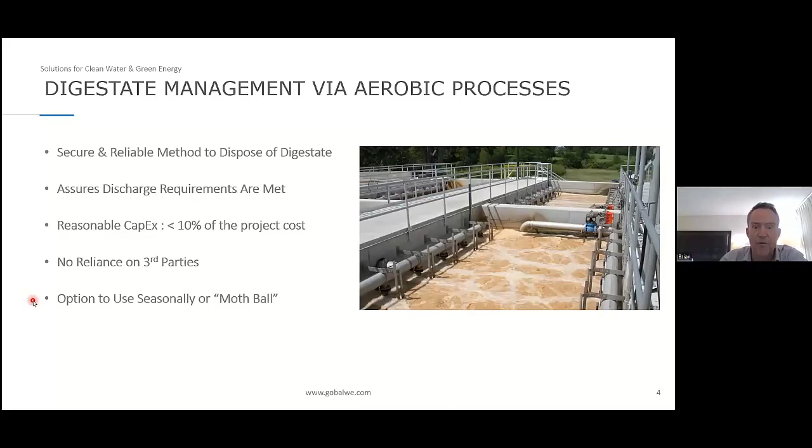It's critical to put another kind of belt and suspenders in here to keep that from entering into your aerobic process, because it brings more nitrogen, more COD, and more phosphorus, and so it can actually significantly change your design or cause operational problems. So your denitrifiers grow here in the anoxic zone. There's communication between the anoxic and the aerobic zone, where your denitrification takes place.

So this is essentially the first stage of the process, and then we go to a second stage. Majority of everything's removed here. The second stage is important for polishing and also to make it the most economical and most effective to do it in two stages.

You may need an external COD source coming in, possibly in the second stage, maybe even in the first stage - I'll kind of touch on that. Jason did touch on that in regards to the COD:BOD ratio versus the nitrogen ratio. And then you've got your last aeration denitrification stage.

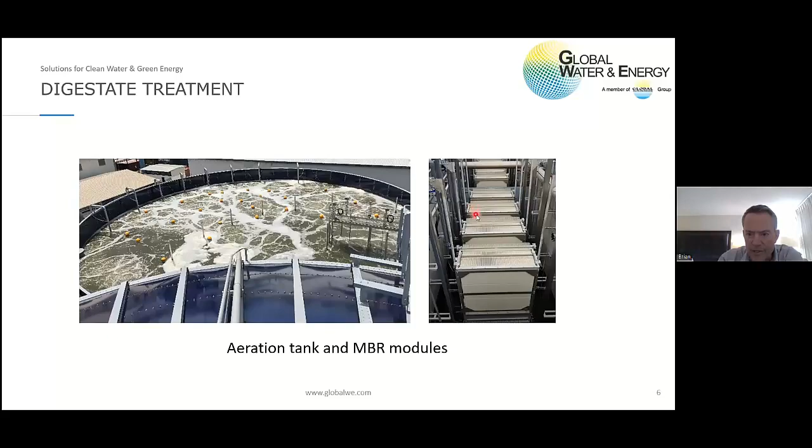Some examples, just to show that GWE has quite a bit of experience here. This is the Stormfisher project in London, Ontario. GWE did this back, I think, in 2014, somewhere around there - so roughly it's been operating for roughly 10 years now.

Here are two thermophilic digesters. They feed the digestate holding tank, or post-digester. We have gas storage here. From here, it goes into the aerobic basin, and then liquid-solid separation is the membrane basin, which in this case is a submerged concrete vault. The membranes are in here, and here's the pumps and blowers for weather protection and such.

Very nice system, but after several years of operation, they actually did find a partner to take the digestate. I was last up there about 18 months ago, and they weren't operating the system at all - it was completely mothballed. They had a good arrangement in place, even up in Canada, for them to haul off the digestate all year round, which allowed them to shut down that system, a significant operational cost savings. But again, they have it, so if that deal ever falls through or they have problems, they can start it right back up in a matter of days or weeks.

Another project that has the same two-stage nitrification-denitrification process to meet dilution water requirements as well as discharge requirements to the permit is Quantum Biopower up in Southington, Connecticut. I believe this was started up in about 2018-2019, so they've been running roughly 5 years now.

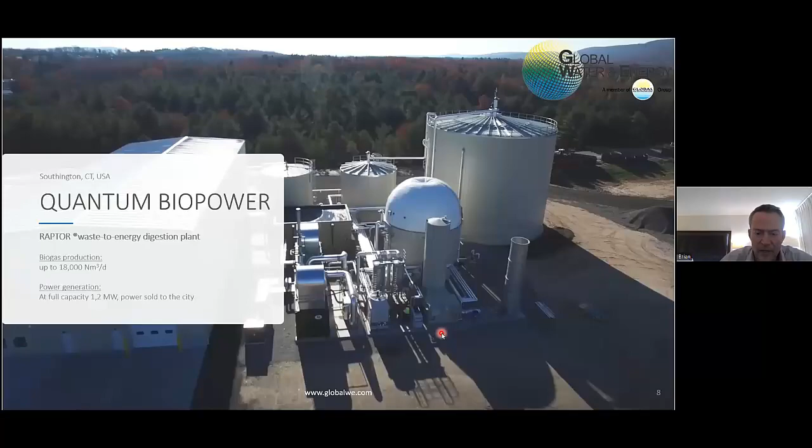And again, the complete design, supply, and engineering was all done by GWE.

Digestate treatment objectives are primarily to meet your discharge limits and keep your plant operational. If you can't get rid of it on the back end, you can't bring it in on the front end. Typically with these food waste digesters, there is some dilution required, depending on your balance of feedstocks, and that requirement will wax and wane. But you cannot continue to throw water back to the front that has high levels of nutrients in it.

Because you're going to end up reaching a toxicity level and causing operational problems within your digester. These are some typical permit ranges we've seen for BOD and TSS - I won't go into that since it's all taken care of easily in this process. The nitrogen and phosphorus ranges can be maybe 10 to 40 milligrams per liter for nitrogen, and phosphorus 5 to 20. You can see extremes on either side, but this process can be designed to meet whatever discharge requirements you have, even a direct discharge to a water course under an NPDES permit.

So it's all achievable. Regarding nitrogen removal, we went over nitrification and denitrification. Essentially, post-anaerobic, all your nitrogen is converted to TKN. Most of the organic nitrogen remains with the solids at the dewatering liquid-solid separation step. The ammonia nitrogen, which is soluble, stays in the liquid, and that's what we need to address in the aerobic process.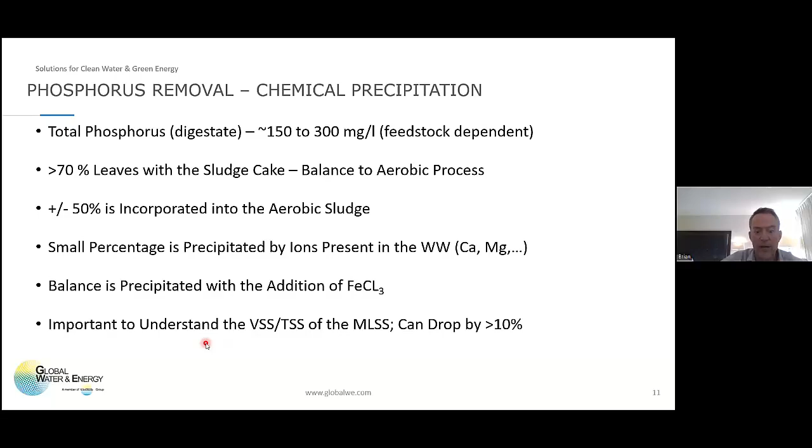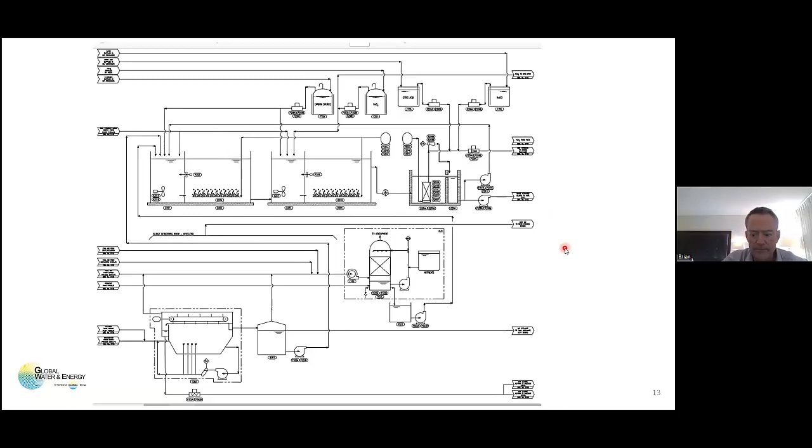This is another facility currently under design that'll go into construction once it warms up a bit. Here, as part of the site, is your digestate holding tank. The digesters are down at the bottom of the page. From here, we feed into two screw presses. The permeate or pressate from the screw presses goes to the DAF. Clarified water goes to the front end of the process.

Here we use the concentric tank design. Our anoxic zone is around the outside of the tank, and we have a submersible mixer here, as well as mixing pumps in the wall to move the water in and out through the system. So again we've got denitrification in the anoxic zone, nitrification in the aerated zone, and then we go to stage two—again anoxic, nitrification, denitrification. From here it goes to the membrane tank.

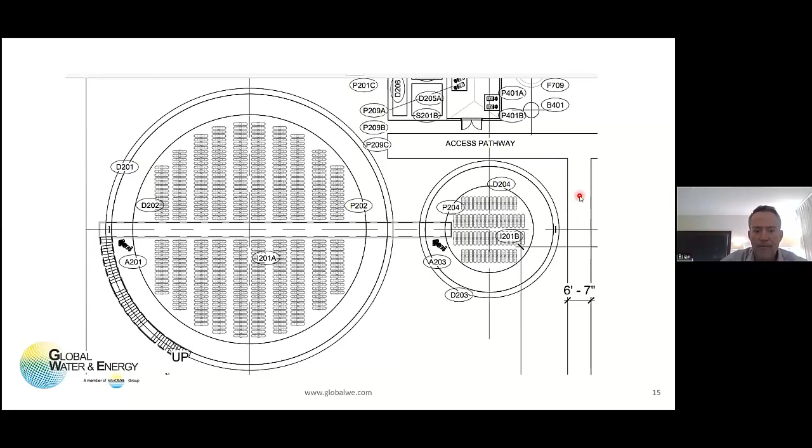So some takeaways: it's quite important to have a belt and suspenders approach after your dewatering system. You really want to keep the anaerobic biomass from entering the aerobic system, because it's just going to bring a lot of COD, a lot of nutrients, and really raise havoc or cause you to have to over design the system.

The other thing to keep in mind is don't underestimate your COD conversion. At GWE, we're typically conservative in our design, so we estimate a certain amount of conversion—in other words, how much COD in the digester is going to be converted into biogas. We generally expect to get more than what we design for, but we plan for that on the aerobic process, because the more substrate you convert into biogas, the more nitrogen you release. So as your COD conversion rate improves, which is what you want to produce more biogas, you're also liberating more nitrogen into your system. You just need to be aware of that in your design, and this is something we're quite familiar with. Again, pay attention to seasonal temperatures.

You're going to see changes in your sludge's ability to take up nitrogen, the nitrifiers and such. So again, that's got to be considered in your design.

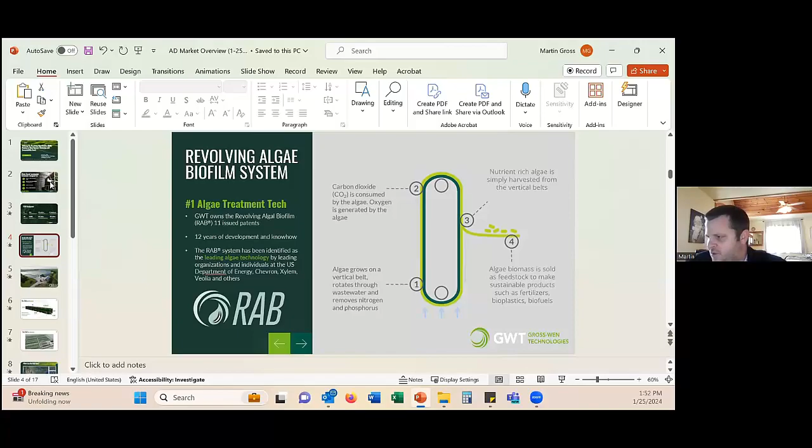So, another differentiator from bacterial-based or chemical-based nutrient removal: we're producing algae, which is valuable. At the end of an aerobic process, you're producing a bacterial sludge that's a cost to dispose of one way or another, or a chemical sludge that needs to be disposed of—it's a cost to the project. When you produce algae, it's actually a revenue stream for the project, and we take that algae and make it into fertilizers, plastics, and biofuels.

Let me play a video here. This is what a commercial facility looks like. This is a 3-belt modular system. You can see it's all positioned within a greenhouse.

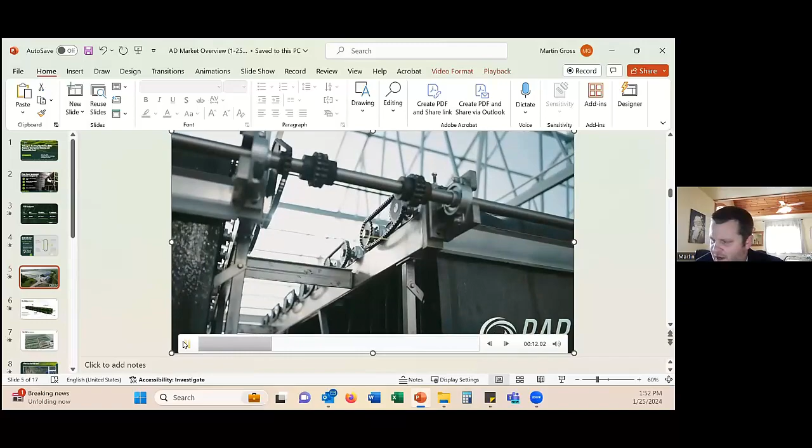Our system is these vertical conveyor belts that are slowly rotating in and out of the wastewater. They're moving really slowly, low tension, moving parts, but the parts that are moving are sprockets and chains at low tension, low speeds. So the actual upkeep on these systems is pretty simple.

What's being shown on the screen now is the harvesting mechanism on the algae system. So periodically that algae is harvested and that mechanical scraper just comes by and scrapes it off the surface. Then that algae gets sent to central collection before we come and collect it and buy it back from you. Again, vertical conveyor belts, algae rotates, algae attaches to the surface.

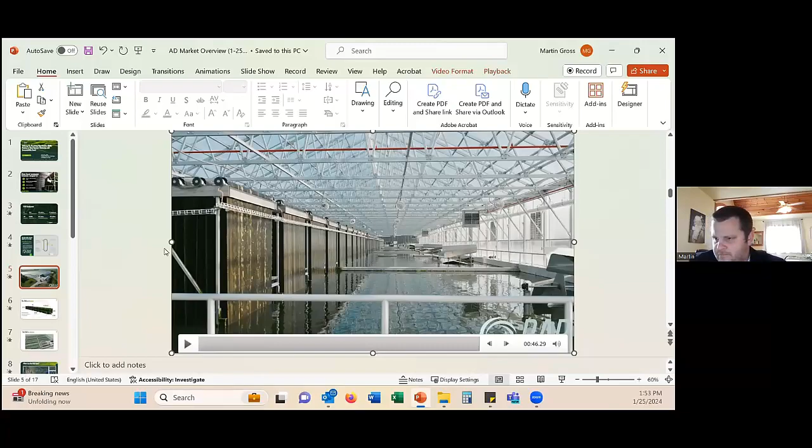As the algae grows, it's consuming the nitrogen and phosphorus from the wastewater. Then the algae is harvested, and as it's harvested, it's actually removing the nitrogen and phosphorus from the system in the algae biomass. It's all positioned within these reservoirs, which are low depth—about 1 meter or 3 feet deep—and positioned within a greenhouse.

So we sell the system in modules. This is what a commercial module looks like dimensionally—about 10 feet tall, about 10 feet wide, and about 100 feet long, roughly. The whole system is driven off a 5 horsepower motor, so again, a very low energy system compared to bacterial-based, aeration-based systems like what we just talked about before. Again, using about one-third of the energy.

One of the challenges with aeration-based nitrogen removal is a lot of energy input, so that's a cost. You're producing bacterial sludge, which is a cost to dispose of. And you're producing a huge amount of nitrous oxide emissions. So from a carbon footprint perspective, from an energy perspective, and a useful product perspective, algae systems have advantages.

Obviously, these bacterial systems have been around for years and years, really reliable, do the job well. Capital costs generally are slightly lower than our system. Operating costs, our system is lower. So there's some trade-offs, and different projects may need a bacterial system or an algae system, depending on what's important to the client—capital, OpEx, or 30-year cost of the system.

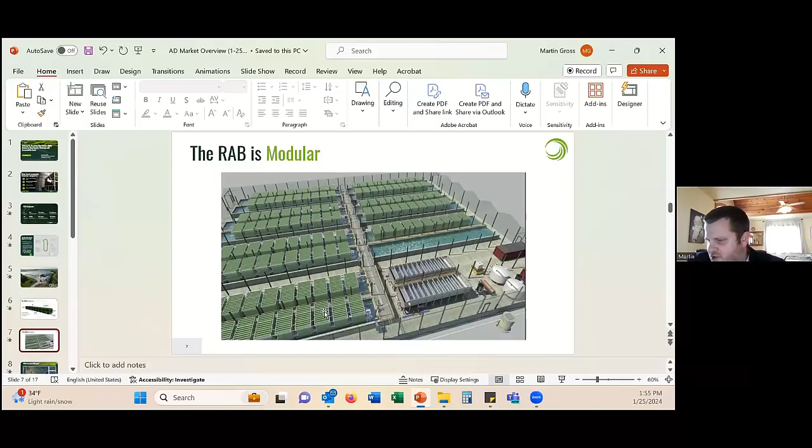This project specifically needed 13 modules, so the water actually flows in and goes through this in series. It'll come into this open reservoir first and then flow through stage by stage until it gets to whatever treatment target you're focusing on.

So we've done about 40 projects now over the past 10 years, a lot in the Midwest. We initially focused as a business on municipal projects, specifically municipal digesters. Since then, we've really found that a niche of ours is

industrial food and waste digesters. The algae grows incredibly fast, and we get really good treatment rates on food and beverage digestate. So this is a prime target, and I know many of the folks on this call are looking at these type of digestion projects.

So food and beverage is a really good application for us. Whether it goes through a digester and then our system for nutrient polishing, and then to a municipality or a treatment district, or direct discharge, we can do either. So we have projects where we're discharging directly into the environment after our system, and then others where it's going back to a municipality. We also do anaerobic digesters at municipal treatment plants.

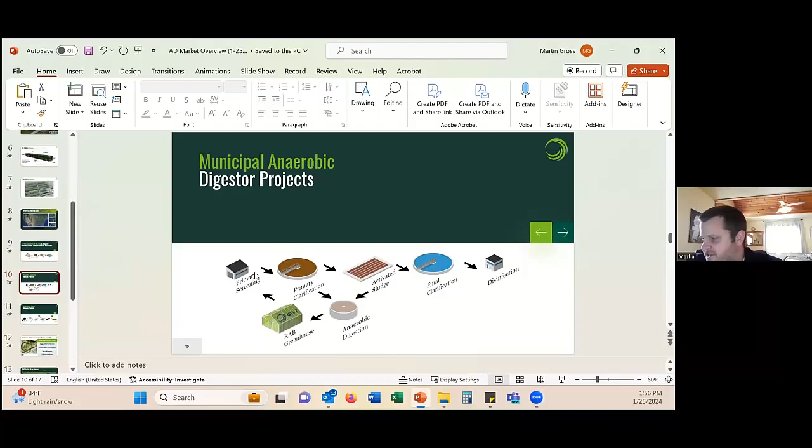There's something called anaerobic digestion side stream in these projects, where basically all the bottom solids from the aerobic and primary clarifiers are going to a digester, and then we would basically pre-treat that digestate before it goes back to the headworks. Creates an exit for both nitrogen and phosphorus here. And then lastly, we've done these agricultural waste projects as well, where we can treat the water before a holding cell or land application to remove nutrients.

So what's the difference and advantages of an algae-based system for digesters compared to conventional bacterial or chemical? First of all, we're doing both nitrogen and phosphorus at the same time. So within the same unit operation, we're removing nitrogen and phosphorus. Not noted here is BOD.

If there's BOD that remains, we also can treat that. We treat nitrogen, phosphorus, and BOD as well, all at the same time in the same unit process. So if you do need more than just one of those pollutant treatments, it may make sense for you to use a system like ours, which can do it all in one unit process.

Next is it's a simple and low cost operation. In the previous presentation, there was talk about all the parameters that are required for effective aerobic nitrogen removal. There's several things in controls and processes that need to be

controlled to make the process work effectively. Ours is really a set-it-and-forget-it type system. Water flows in, goes through the system, and as it comes out, it's going to meet its treatment target. You're not messing with DO or VSS or solids retention time.

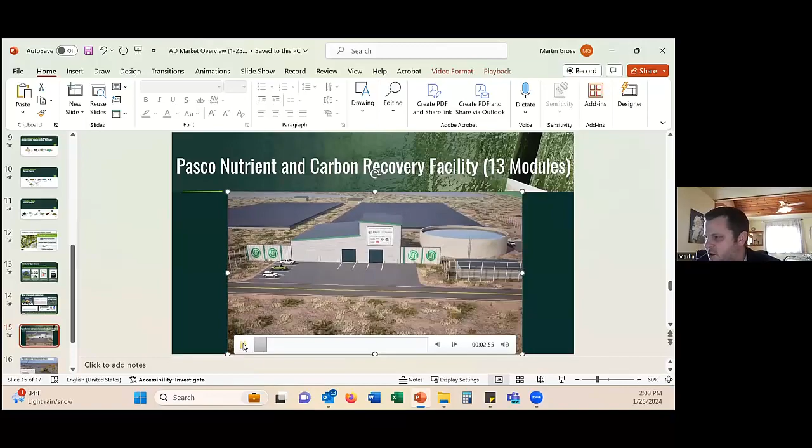This is the project with Pasco, Washington. This is 5 industries and an industrial park in Pasco, in the Tri-Cities area of Washington State. They needed to remove nitrogen specifically, putting in new greenfield digesters to treat their waste before land application. They have these Evoqua low-rate digesters there, and then they're putting the algae system on the back end of the digester for nutrient removal.

So this project is currently under construction, starting up later this year. You can see what this looks like on site compared to the large footprint digesters. Again, our focus on this project is nitrogen removal. This is what the project looked like, at least in November, so it's well underway in construction.

This is a 13 module project for us, about 4 million gallons of wastewater per day of flow, removing over 2,000 pounds of nitrogen per day. When we put the project through our accounting model, we're able to demonstrate that the system removes about 5,300 metric tons of CO2 offset per year compared to conventional technologies.

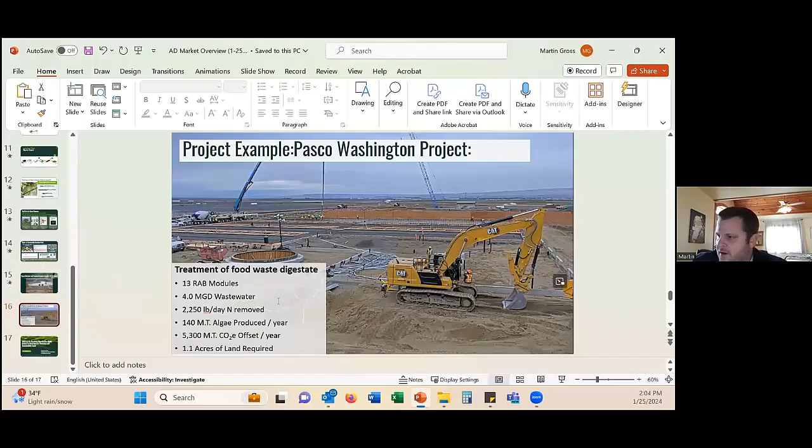There's no ammonia inhibition upper limit here, you can just kind of take 2,000 ppm, no problem? Yeah, so there's ammonia toxicity in algae at a certain level. Certain projects like these dairy waste projects have 2,500. We can't just do this in batch where you're providing the algae system 2,000 parts. You either need to manipulate pH to lower the free ammonia concentration, which can be controlled, or you control your feed rate, and that's usually the way we do it. So in our basins, we're never at that 2,000 concentration, we're recycling back to dilute.

It's something we look at specifically on projects that have ammonia concentrations over 400. That's probably where we want to keep track of it, and just put in a control strategy for pH and maintain a free ammonia concentration at the right level.

Thanks, Martin. Great job. Wonderful technology. Just pretty easy peasy, right? You just kind of put it in, it just kind of runs. So that Slater, Iowa project is pretty cool. If anyone wants to go look at it, it's a nice, clean design.